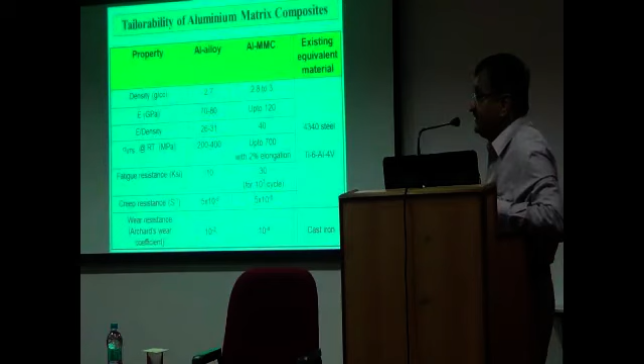When you composite with this reinforcement, you can get a density of about 2.8 to 3. What's most important is the elastic modulus, the stiffness, the specific elastic modulus, and the UTS—the ultimate tensile strength—at room temperature.

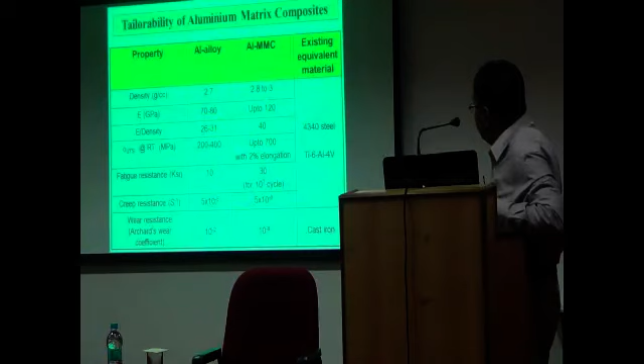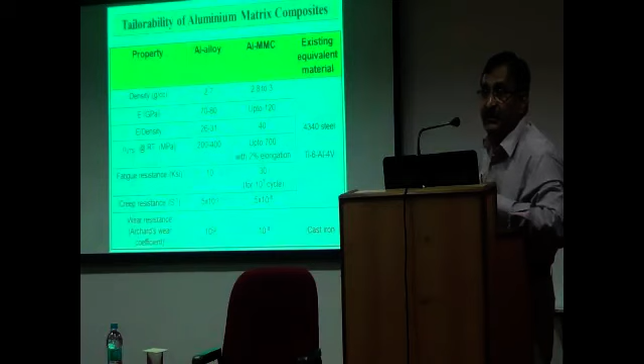If you look at these values for aluminum, how much can you change? You can see E70 to 80 can go up to 120, and the specific elastic stiffness from 26 to about 40, and the UTS up to 700. These are properties which you see only in steel and titanium alloys.

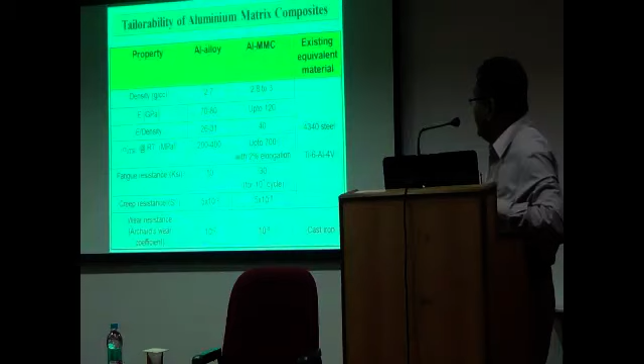It means steel, which has a density of more than 6 - at one third that density you can achieve the properties of steel, and of titanium, which is a very expensive material, by compositing aluminum with any of those reinforcements. Similarly for wear resistance, cast iron is the most wear resistant material, used in brake discs and many damping applications. Instead of cast iron, you can get the same level of wear resistance. Aluminum generally has poor wear resistance, but if you composite aluminum with reinforcement, you can achieve the properties of cast iron at one third the density. If you use a brake disc, generally made of cast iron, weighing a certain amount depending on the vehicle - car or train - you can reduce the weight of those wheels by almost one third using aluminum, achieving the same wear resistance as cast iron. So this is the objective and the beauty of compositing with reinforcements.

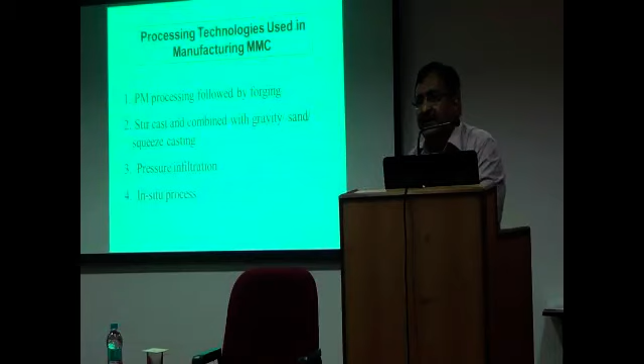Once you know this, bringing these two together, you can achieve and produce the composite. There are several methods of producing a composite. Material normally exists in a solid state - you can start with a powder, that's called the powder metallurgy route. There's a casting route, where materials are made by the casting process in a foundry - you melt a material, add this reinforcement, mix it, and produce a composite. Pressure infiltration is another similar process, except with application of pressure. In situ process is another one, which I'll describe later in the lecture, where you create the reinforcement in situ inside the melt by a chemical reaction. So you don't bring two separate constituents together - you start with a metal, and by injecting chemical constituents through a chemical process, you generate dispersions of particles, or nanosized particles, or whatever you want. This is called the in situ process.

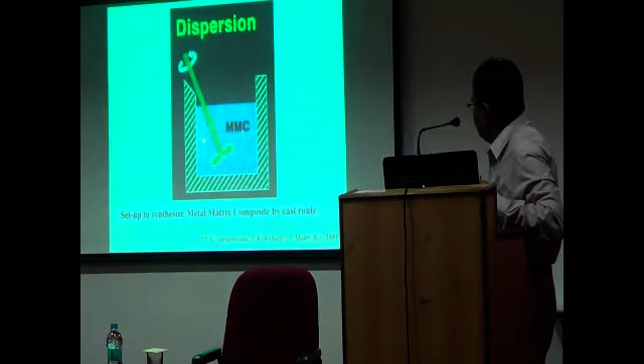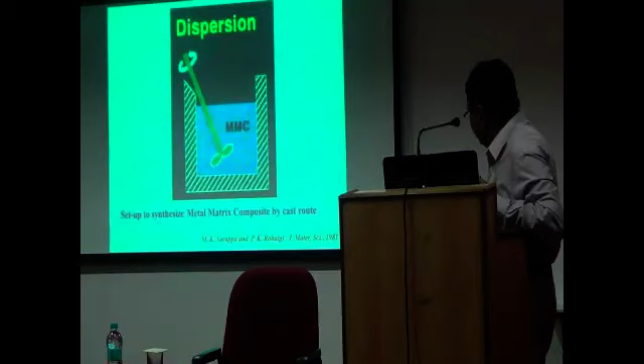Now, these are the difficulties - I don't want to get into this. This is basically the simplest process that we developed long ago, where you have a liquid metal. Here you see these small granules - these are the particles, shown a bit blown up, but not actually that size, only about 100 microns. You mix them and produce a composite. We did this work very long ago, and you can mix the constituents.

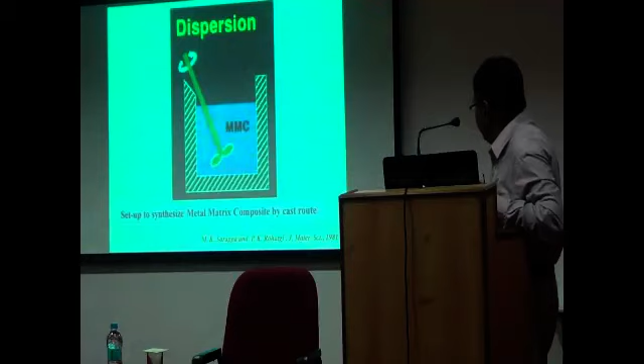As I showed you, bringing two constituents together - the matrices could be aluminum or magnesium, and the reinforcements could be silicon carbide, boron carbide, aluminum oxide, nitrides, or fly ash. Fly ash is one of the most inexpensive reinforcements available, since it's a byproduct available in nature from thermal power stations. So we thought we could make use of this. We have produced composites with all the matrices I mentioned, combined with all these reinforcements.

This is how this reinforcement looks like under the scanning electron microscope, at 40 to 100 microns. You can see the fly ash is available, the spherical one is hollow, and its density is very low.

So when you produce this composite, it gives you very low density, which is an advantage. These are the various properties of the reinforcement. There must be a basis for the choice of reinforcement: it must have a very high melting point, high elastic stiffness, reasonable strength, high wear resistance, low density, low expansion coefficient, and cost considerations.

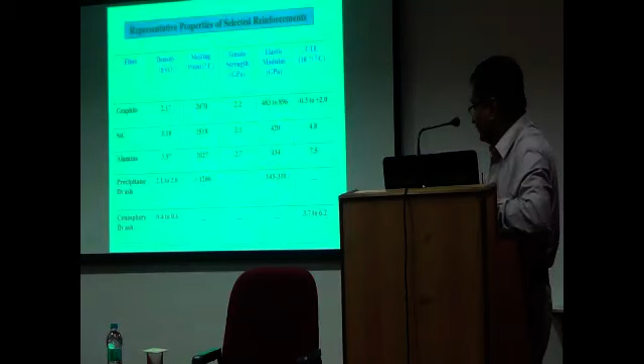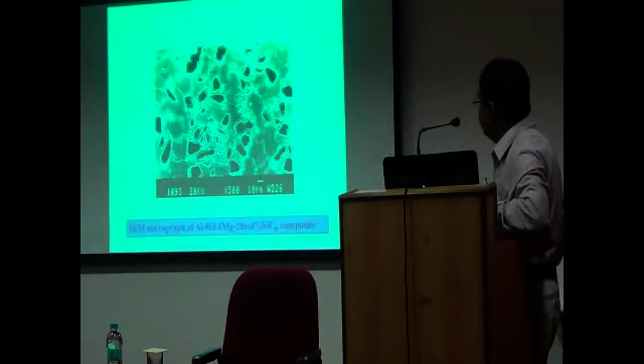This is the material we produced in our laboratory. This is basically the continuous matrix, aluminum, and these dark particles are the silicon carbide particles, about 20 to 30 micron size. When we have these particles embedded in a continuous matrix, this becomes a composite, produced in our laboratory by what we call the casting process.

I wanted to tell you, when we did this work about 30 years back, there were no patents. People were not aware of patents, nobody knew about them, and there was no interest in patents or anything like that. The research was passionate about producing new materials. So we did not patent at the time, because we did not know how to go about it.

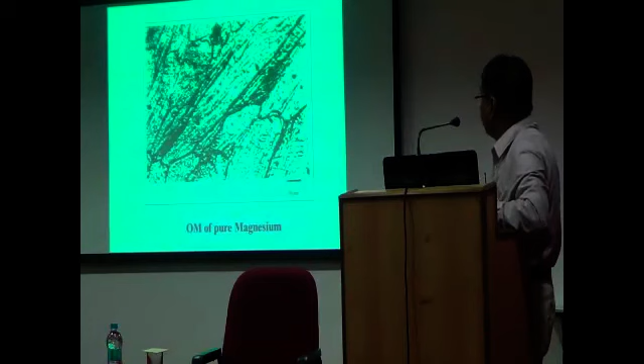For example, I just wanted to show you this pure magnesium, you can see the very large grain size. When you add silicon carbide to this, you can see what a fine grain size you get. So in addition to the particle effect, grain size changes, and as grain size changes, properties change.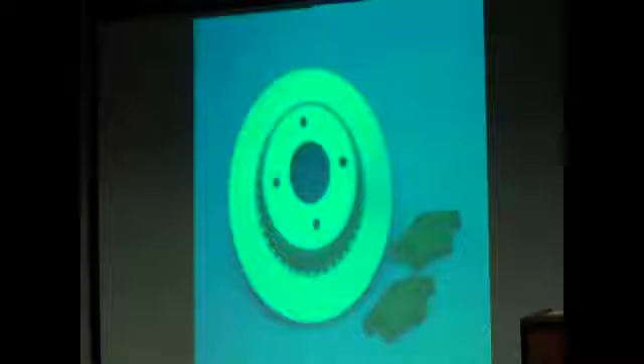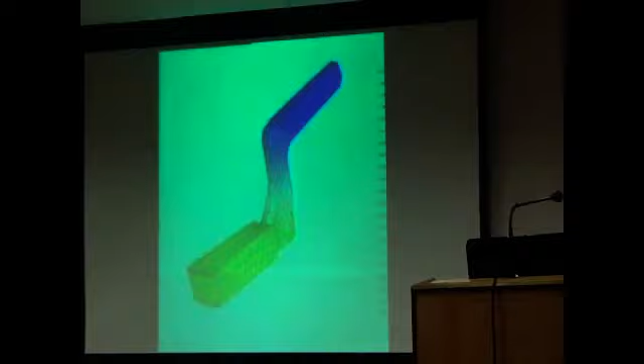A CAD model of the disc has been developed, making it possible to simulate temperature distribution. The disc's geometry has to be optimized with regard to stresses, temperature distribution and manufacturing requirements.

Direct squeeze casting is the casting process that meets the cost goals, combining high material utilization with a virtually ready-for-use form. A new tool design was specially developed for this casting process.

A casting system was developed, whereby the furnace and press are interlinked to form a single unit. In this model, bars of composite material are transformed into finished blanks.

The molten material is pumped into the mold and is then allowed to solidify under high pressure. This process produces a dimensionally accurate blank, which is entirely free of pores. The cycle time is about 30 seconds. The production volume determines how many molds will be built, which in turn promotes a flexible investment structure.

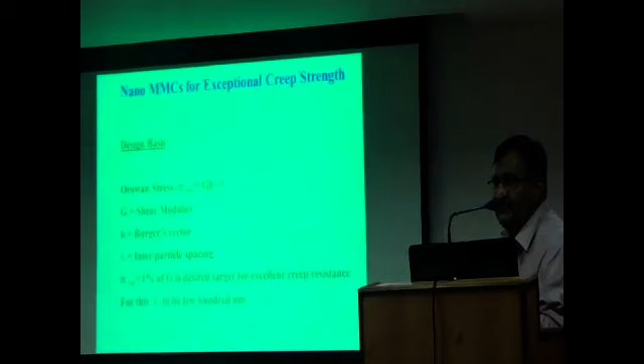The reason why we went ahead and thought about the nanoparticle is the basis for it. In general, if you use any aluminum, any metallic material, only a fraction of the shear modulus is the strength, because of the easy movement of the dislocations, plasticity and all. It is less than 0.1%, 0.2% — that is the strength as a percent of the shear modulus of any given material.

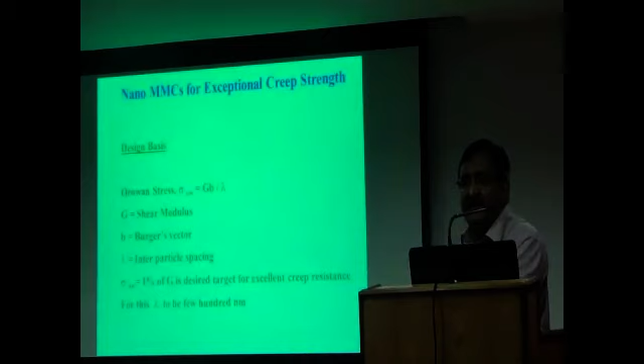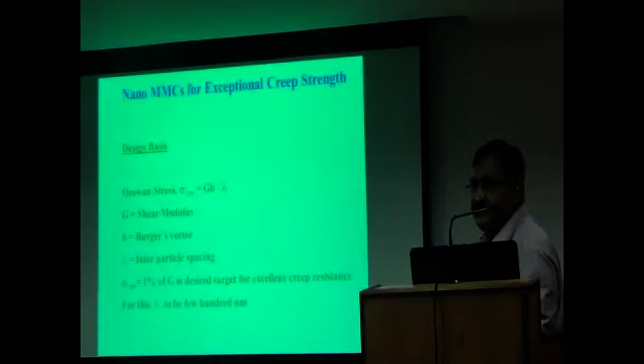If you want to really use 1% of the strength, the shear modulus, the basis for such kind of alloy design is you will need to create an interparticle barrier for the dislocation movement, having an interparticle distance of nanometer size, less than a few hundred nanometers. You can achieve this few hundred nanometer interparticle distance only when you have nanoparticles as the dispersed phase.

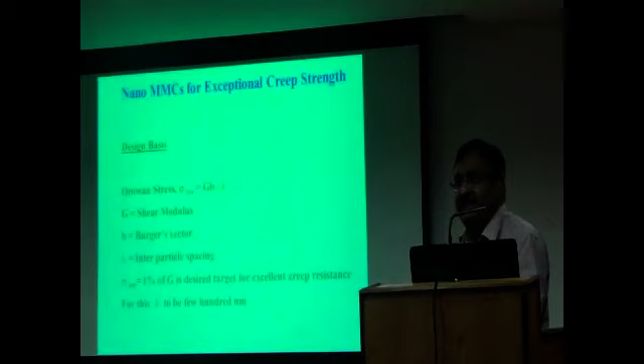So based on that clue, that understanding, we went ahead adding nano-sized particles, creating nano-sized dispersions in aluminum magnesium alloys.

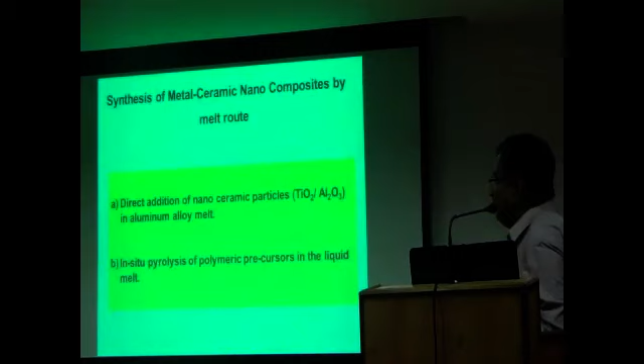So we have done this work by direct additions as well as by what you call the in situ pyrolysis of polymer precursors in the liquid magnesium alloys.

This is the direct addition of alumina particles. We have created certain specific methods to add these particles. So this is how it looks like.

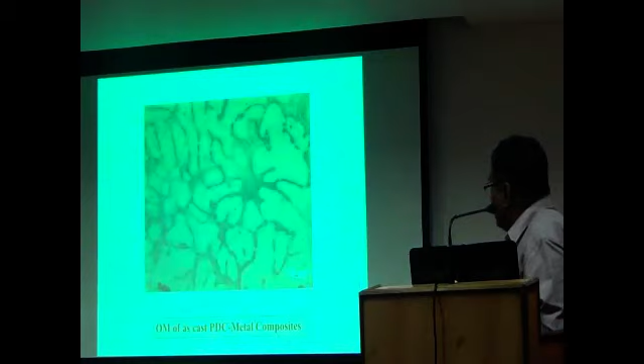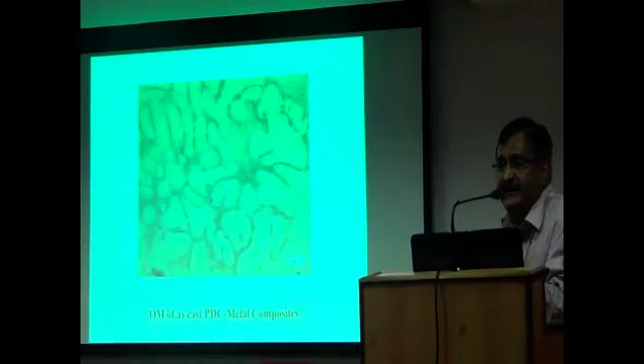The other method I talked about is the in situ pyrolysis process. It means we basically choose some kind of polymer precursor, add it to the liquid magnesium, pyrolyze it, and produce nano-sized ceramic particles. So you use a metal polymer to produce a ceramic of a nano-sized dispersant.

When we did that work, you can see the kind of properties that you can enhance in the magnesium. This is how the microstructure looks like. These are the dispersoids.

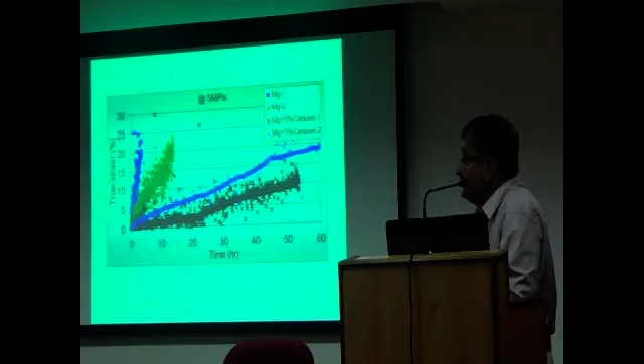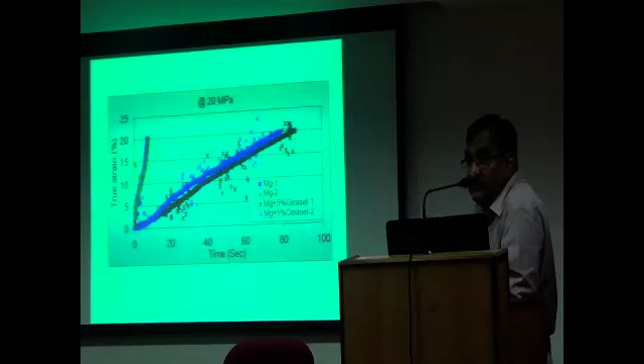There's nearly a two-fold decrease even at stress levels like 5 MPa, 10 MPa, or even at 400 degrees centigrade and 20 MPa. So compared to pure magnesium, even at a stress level of 20 MPa, you can get 2 times the creep resistance of pure magnesium. This is possible with just 5% of the nano-sized ceramic particles.

This is another graph to show you the creep resistance, and these are the data values at different stress levels, showing how much strain the composite undergoes. Compared to pure magnesium, you can see 1.8 times 10 to the minus 2 versus 10 to the minus 3 at 20 MPa, almost twice the value.

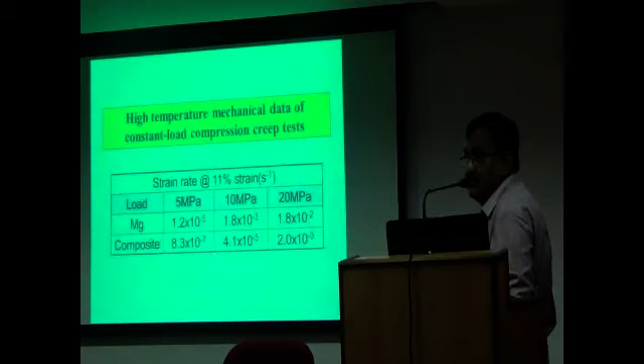I'll just go through this one very quickly. The nanoparticle dispersed composites are just on the horizon. We are just evaluating the properties. They are still not in use, not tested in actual applications.

In the early years, these metal matrix composites were focused only on high volume applications like automotive applications - pistons, cylinders, and so on.

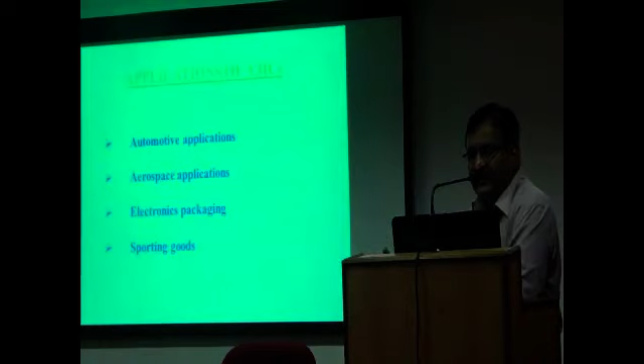But more recently, because of electronic packaging going through miniaturization, these composites are finding application in packaging for two reasons: good thermal conductivity and low coefficient of expansion, and being completely metallic, packaging becomes very easy.

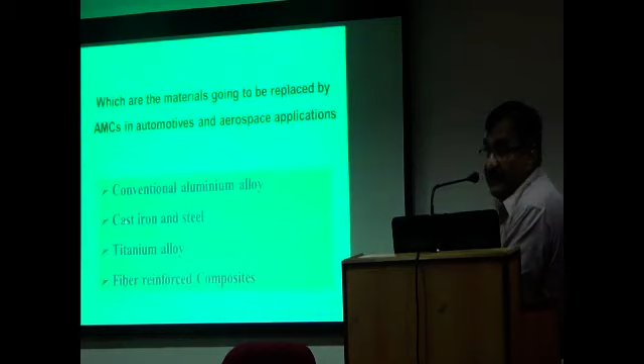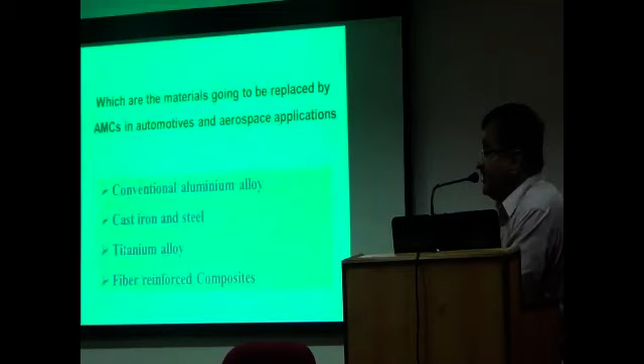Where are these composites going to replace materials? Aluminum composites replace conventional aluminum alloys, improving performance and efficiency. They replace cast iron and steel to decrease weight, titanium alloys to decrease cost, and even fiber reinforced composites, which are very expensive both in cost and manufacturing difficulty. So these simple aluminum matrix composites can substitute any of these materials in several applications depending on the type of application.

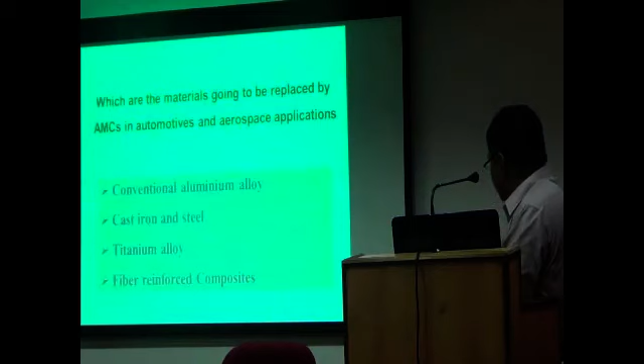When you have an aluminum ceramic either in the form of a skirt, in the top portion, ring portion, or the entire material, the piston is made up of MMCs, it has several advantages.

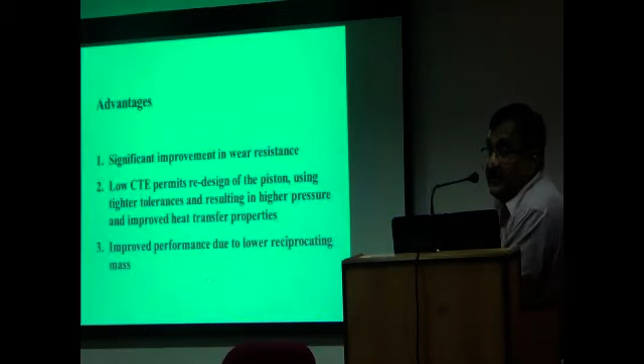These advantages are: significant improvement in wear resistance, and because of the low CTE, coefficient of thermal expansion, of these aluminum composites, it allows redesign of the piston using tighter tolerances, resulting in higher pressure and improved heat transfer properties. Improved performance due to lower reciprocating weight, lesser fuel consumption - these are the advantages of aluminum composite pistons.

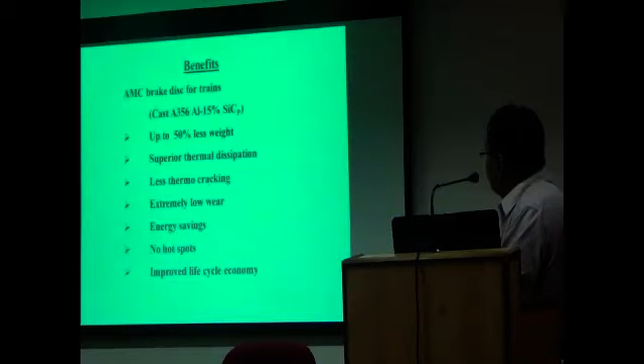And the brake disc, I already mentioned to you, is used both in trains in Germany as well as in Europe in many cars. The benefits of using composites in train brake discs are many, including 50% less weight, extremely low wear, energy savings, and improved life cycle economy.

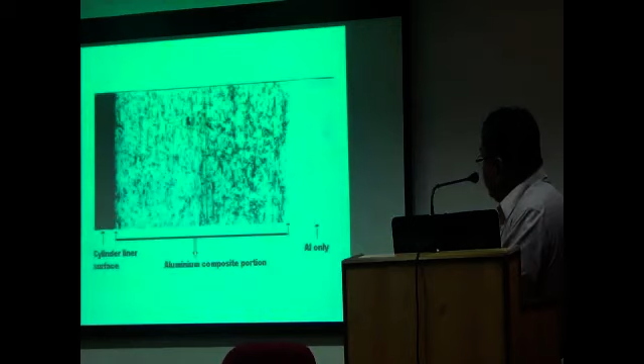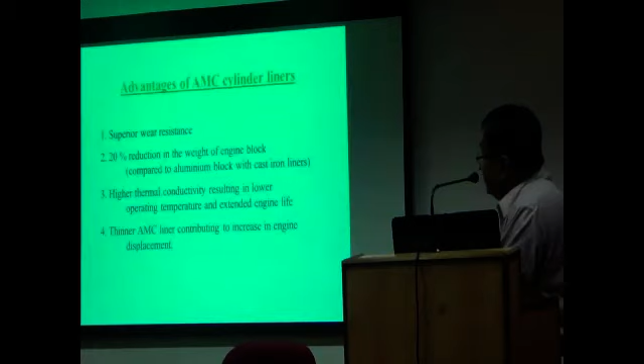These composites have been used in brake discs and drums in various cars, and in cylinder liners, where the liners are made of aluminum composites. This is what the microstructure looks like. You can see the advantages of cylinder liners made of composite: 20% reduction in the weight of the engine block, higher thermal conductivity, and a thinner AMC liner contributing to increased engine displacement.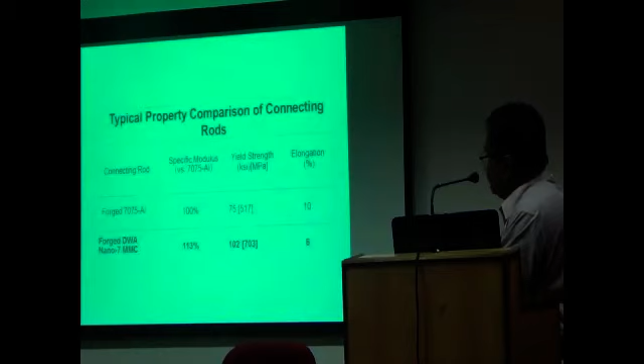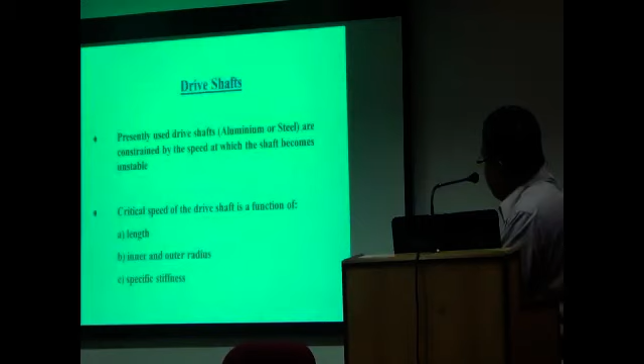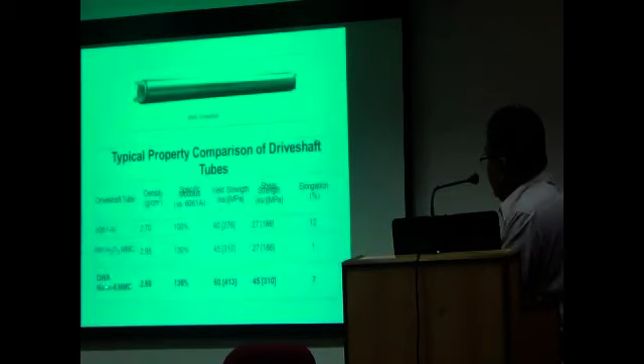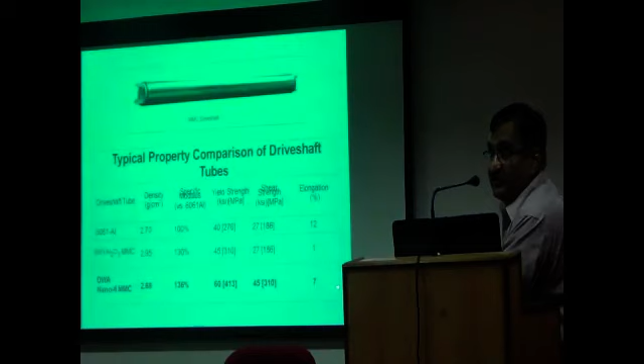Drive shafts used in various passenger vehicles are constrained by the speed at which the shaft becomes unstable. If you use an AMC shaft, it helps you have a longer length and a higher specific stiffness. You can see the specific modulus, density, and various other properties of these composites. This is the conventional composite used until recently, and this is the nano MMC produced by the DWA company - you can see you can go much higher than this. One difficulty with conventional MMCs is ductility, but you can overcome the ductility problem using nano-sized particles, achieving 7%, which is adequate for a variety of applications.

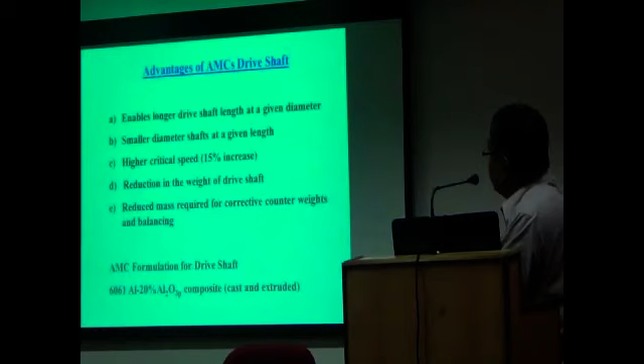The advantages of these drive shafts include enabling a longer drive shaft, smaller diameter shaft, higher critical speed, reduction in the weight of the drive shaft, and reduced mass required for corrective counterweights and balancing.

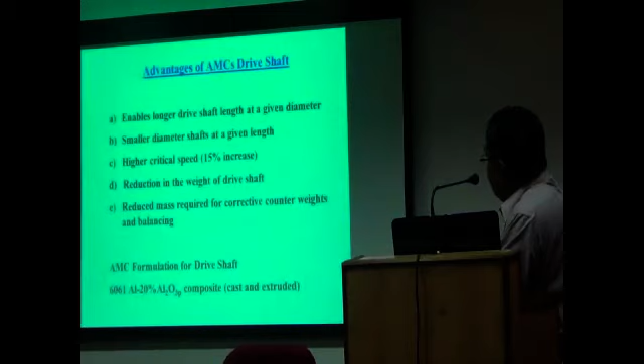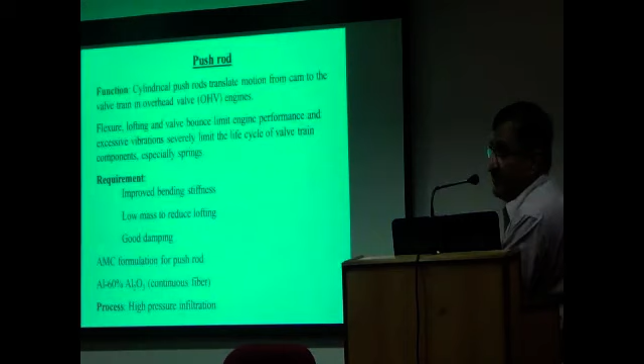This is the push rods, again AMC rods. Push rods are used to translate the motion from the cam to the valve train. When you use this, for the same length, AMC push rods give you 50% lighter weight than steel push rods, and they are stronger than steel, stiffer than steel, and have many other advantages.

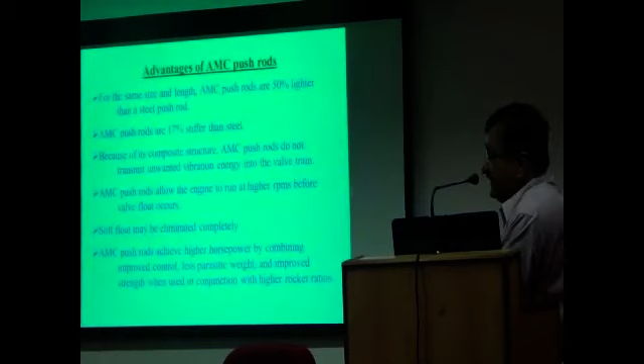Aerospace applications include the ventral fin and engine guide vanes in Pratt & Whitney engines, fuel access cover doors, and helicopter blade sleeves. These blade sleeves made of AMCs, compared to titanium alloys, give you much longer fatigue life.

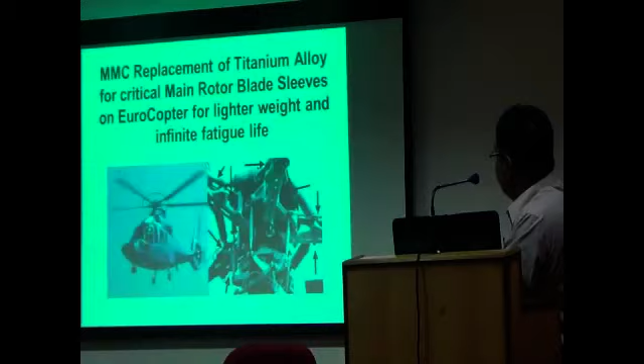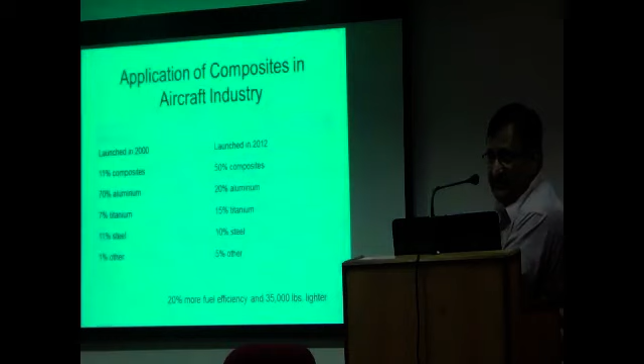Once you have the lightweight and fuel efficiency, the comfort inside the cabin is much better, providing all the comforts. This is how the whole aircraft industry is moving ahead.

These are, as I mentioned, various benefits of the fan exit guide vanes of the Pratt & Whitney aircraft engines. This is the blades, guide vanes of aluminum MMC for non-structural applications. I've listed out various applications here.

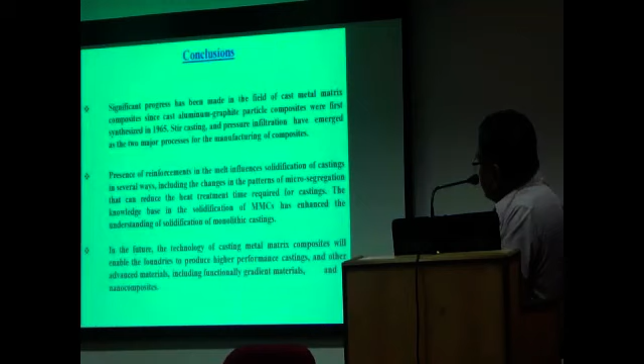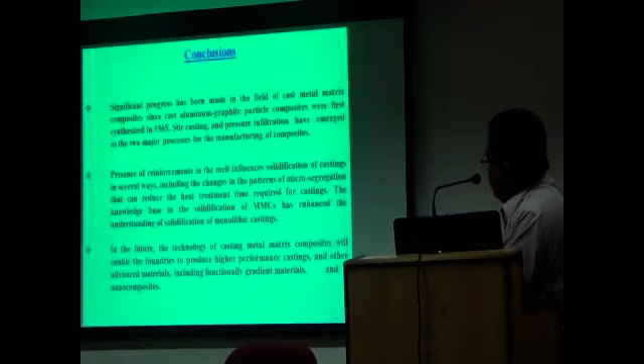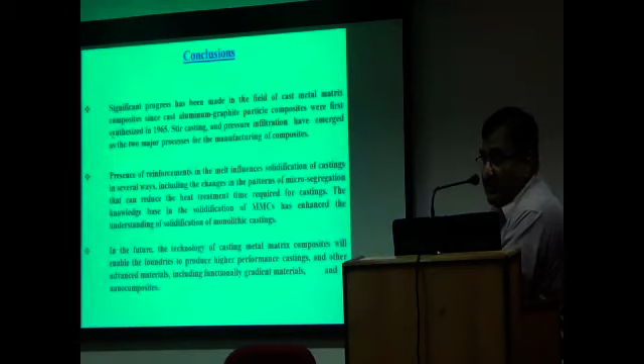So with all these points I have shown you, I would like to conclude my presentation. Significant progress has been made in the field of metal matrix composites since they were developed in the 60s and 70s. Now there is a greater understanding of the process, fabrication, and formability of these materials, the availability of nano-sized dispersoids, understanding of the physical phenomena between the molten metal and ceramic constituents, and the stability of nano-sized dispersions in molten metal. So it is now more easily possible to produce nano-composites at a foundry level.

These days, you must have read in newspapers and scientific journals that nano-sized particles are available only in very minute quantities, a few grams, in very small sizes. But it is possible to produce large real engineering castings with nano-sized dispersoids, exhibiting all the superior properties of nano-sized composites, for a variety of applications. So you can enhance performance, not only durability and life cycle, but also efficiency, and derive several benefits through the use of these nano-composite materials.